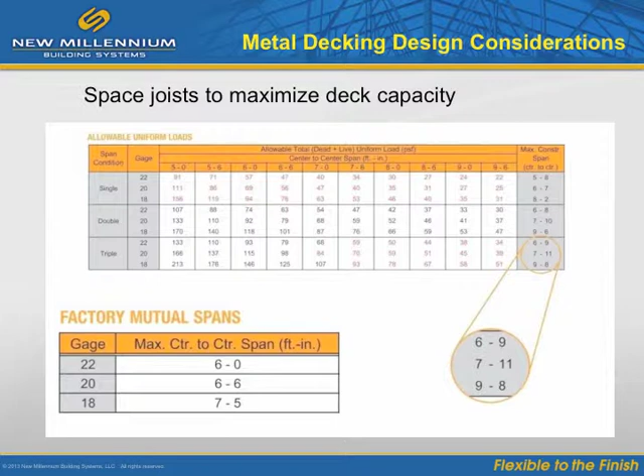Let's review ways to cut steel project costs in the area of decking design. We have made the point that increasing support member spacing not only saves steel, but also saves on piece count. A smaller piece count means less fabrication and erection time, and cost savings are compounded.

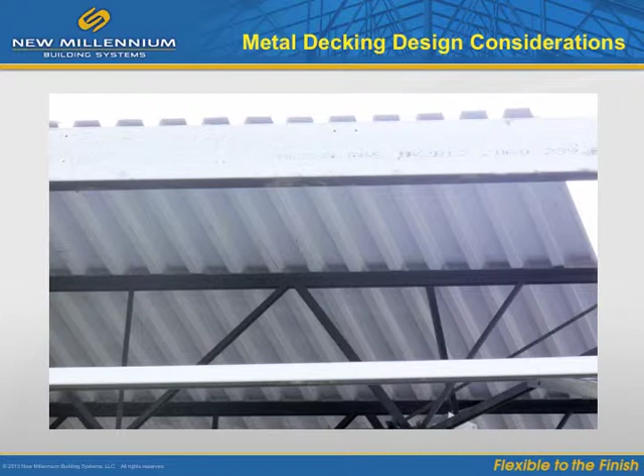When it comes to decking, a common practice is to specify the gauge as minimum. This can result in the use of a thicker gauge than is required. Always specify the gauge and finish along with deck types. This will generate more accurate quotes and eliminate the possibility of coil inventory problems at fabrication time.

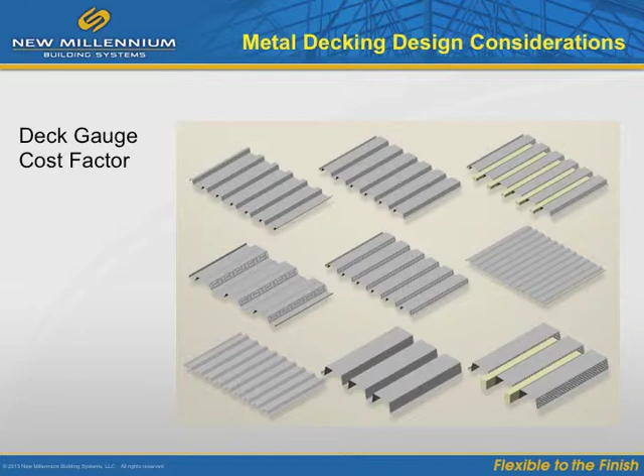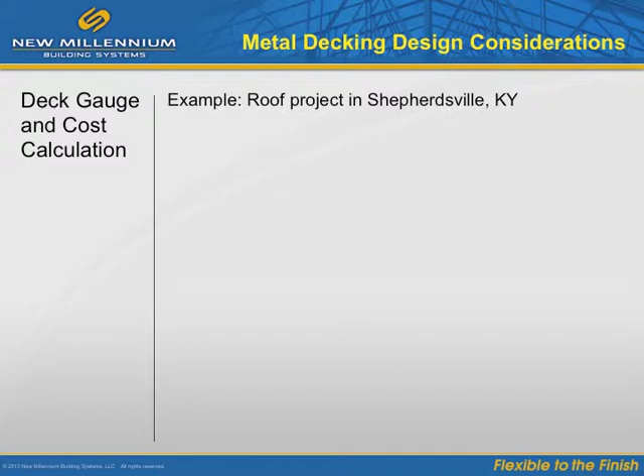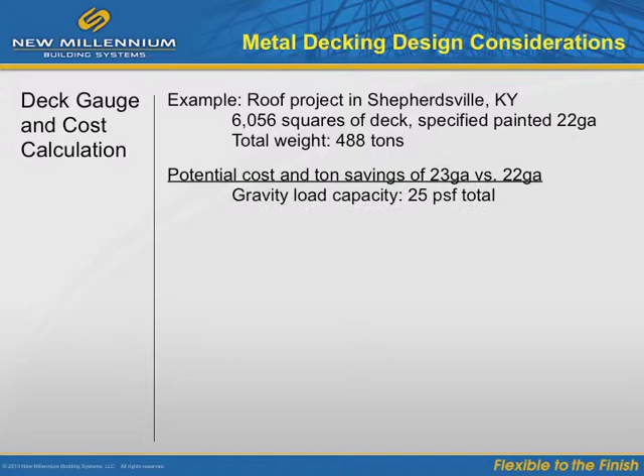One way to reduce deck costs on large projects is to specify a special thickness instead of a standard gauge. A deck project in Kentucky called for over 6,000 squares of B deck, painted 22 gauge, totaling 488 tons. By switching to 23 gauge deck, the project experienced an 8% reduction in decking costs and a 2% overall reduction in the joist and deck package.

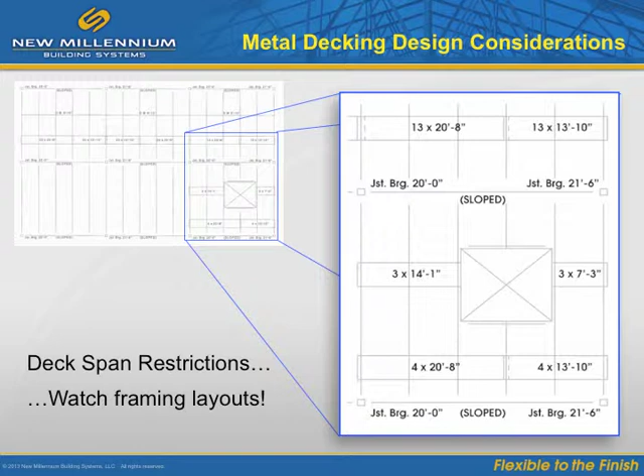When determining deck gauge, be aware of framing layouts that result in single or double span conditions. These conditions are due to sheet length or weight, deck openings, roof slopes, and columns that continue above deck. In the illustration, the joist girders are sloped as indicated by the bearing elevations on the bay. This requires a two-span condition in each bay. Such conditions should be considered when determining deck gauge.

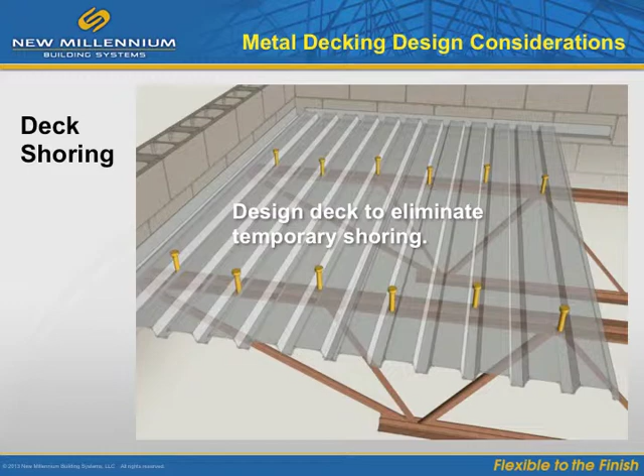Shored deck construction is slower and more costly than unshored construction. To avoid this, the engineer of record needs to specify the deck type, gauge, and span conditions for unshored construction. And when shoring is required, notations need to be made on the contract drawings to alert all those affected.

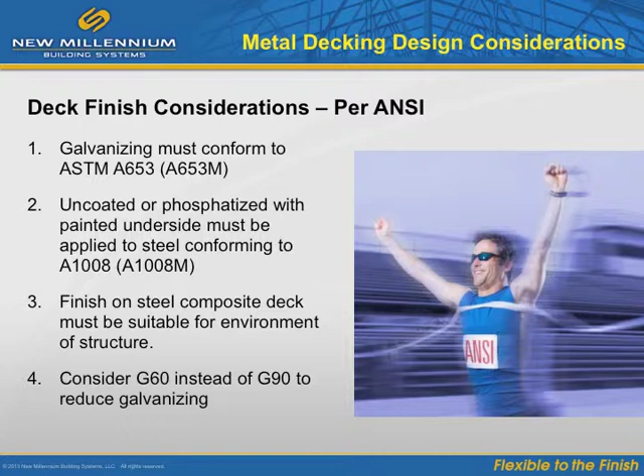Proper deck finish is critical for overall performance. ANSI requirements are: galvanizing must conform to ASTM standards. When phosphatized and painted undersides are required, this must be done according to ANSI. Consider the environment of the structure. And do you really need G90?

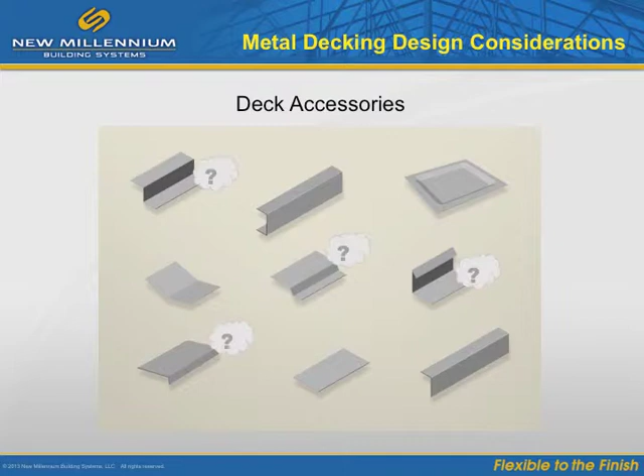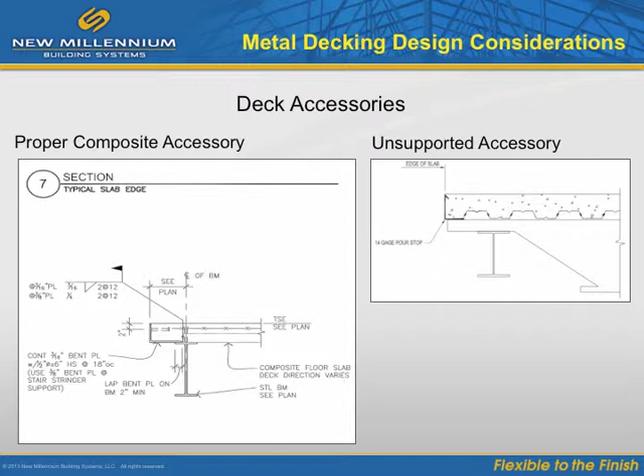Deck accessories is another area for cost prevention. First, clearly identify each accessory. When not identified, they can all look similar. Identifying each accessory assures that all are accounted for. When an accessory is missing at a job site, this adds to erection management time and project cost.

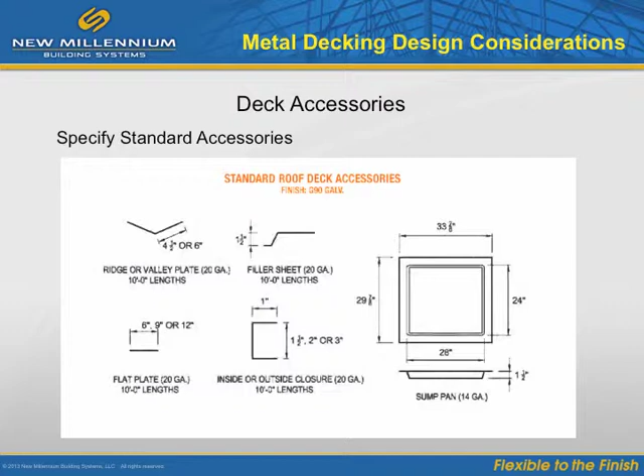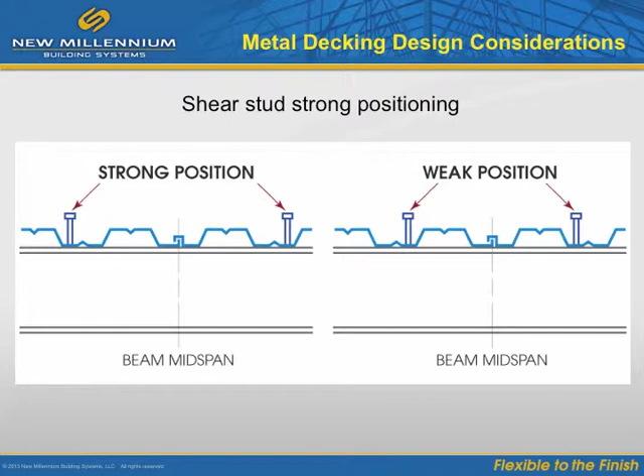Also, try to specify standard deck accessories. Non-standard accessories will almost always add cost to a project. Engineers should show the strong position placement of shear stud to be placed on the contract drawing. This gives the composite slab a higher strength without having to add time, material, and aggravation. This practice needs to be recognized and adopted in the field.

Of course, cost-effective steel project design often begins with meeting the architectural goal. To support new architectural ideas and related roofline shapes, the use of special profile joists has grown. The specifications for these types of joists have been vastly expanded in recent years.

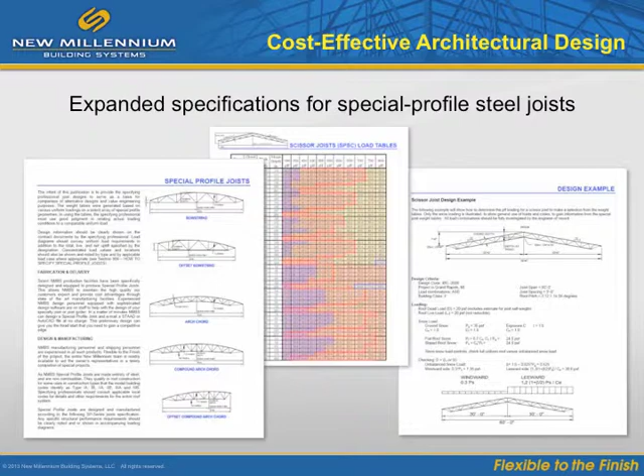So it is now much more practical for an engineer to achieve some of the more imaginative architectural goals using steel joists. In every case, we start with the architect's vision, but it is up to the engineering profession to make these visions practical and cost-effective.

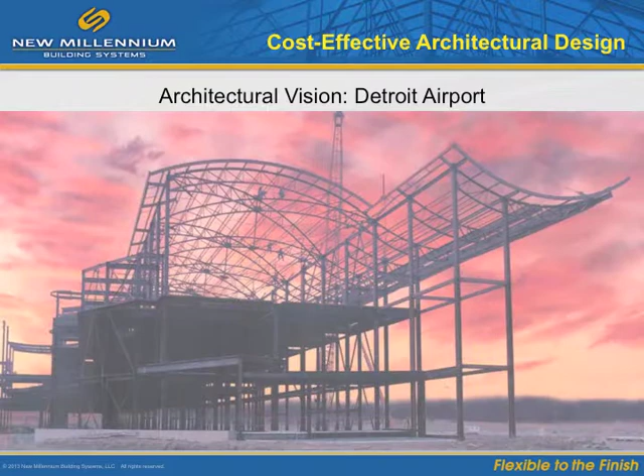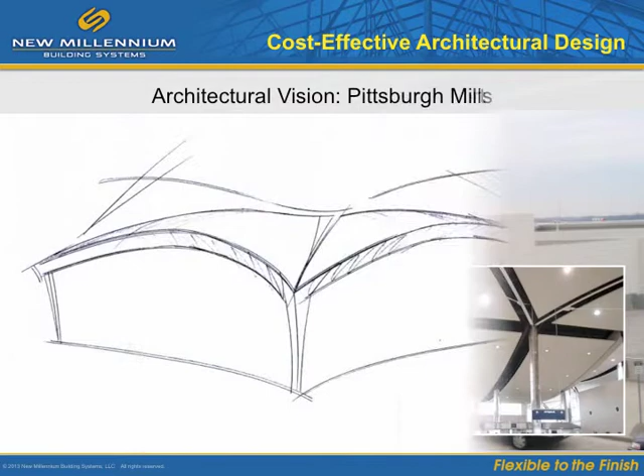By involving joist engineering early in the design process, you can quickly evaluate a range of cost-effective ways to achieve your architectural goals. Our investments in new chord rolling and rigging systems have expanded the possibilities of special joist production, including special accents and other structural treatments.

By taking the project owner or developer's point of view, we can better understand the future of total project cost accountability. Building information modeling has come about directly in response to the need for total project cost accountability. We have learned several lessons about BIM. First, BIM is a team approach, and BIM works best when joist and deck design occurs early in the project.

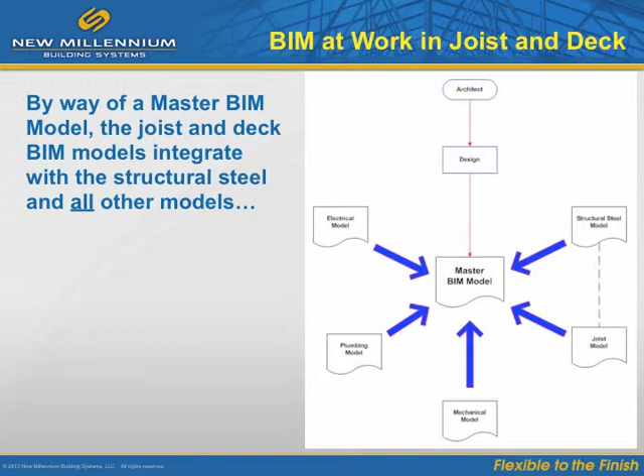The steel joist BIM model and all other models flow into the master BIM model. Note the dotted line between the structural and joist models. These models are submitted together for the master model.

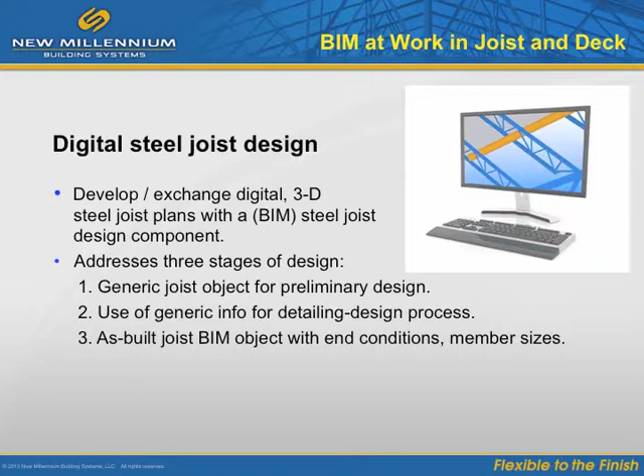Digital steel joist design is facilitated by a digital design component. The component enables BIM-based collaboration at every phase, starting with initial generic joist placement by the designer, then sharing initial generic joist detailing information, and then the creation of the final 3D model for discussion and refinement of the plan.

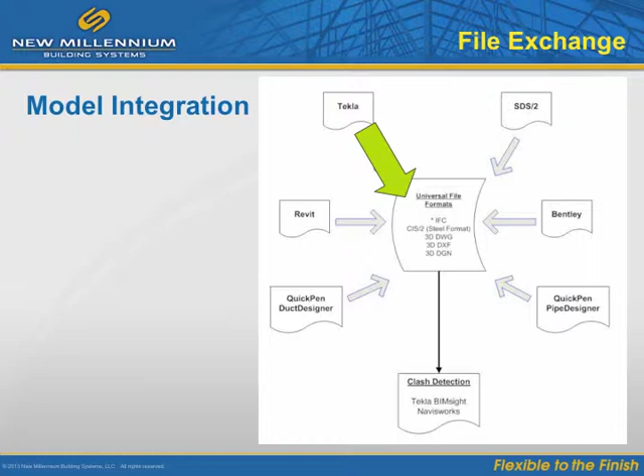The BIM joist design component may be an add-on to the software provided by structural design software companies. Using the IFC format, BIM joist models can be exchanged with anyone on the project, regardless of what software they are using. IFC stands for Industry Foundation Classes, established by the Building Smart organization.

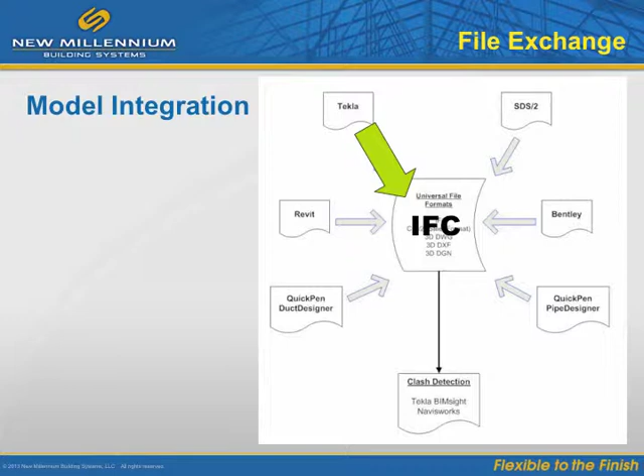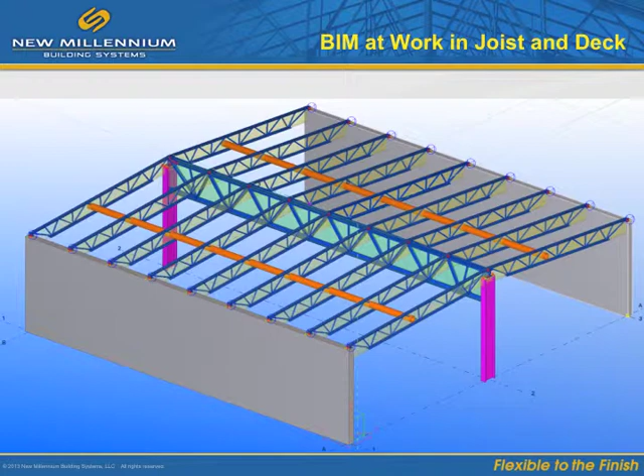Here is how 3D digital design works in the steel joist environment. Conventional 2D design packages will generically represent joists in a drawing. To give these generic shapes actual dimensions, the joist supplier uses a design software component or plugin compatible with the 3D structural engineering software. So right away, you can see what is going on in the plan.

You can see that we have a clash here with a mechanical run. Here's another look. By quickly changing dimensions, you can avoid the conflict and immediately verify the correction.

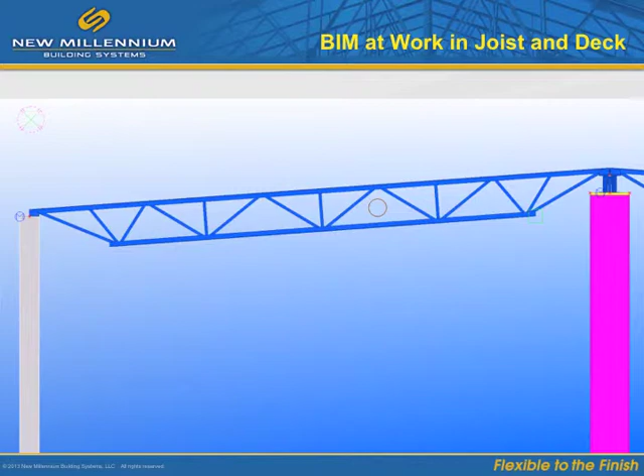BIM-based design projects are especially effective from the owner's point of view. The entire structural package, including joists, was modeled in 3D BIM, here using the Autodesk Revit platform. The timeline for shop drawings was reduced from 10 weeks to 3.5 weeks.

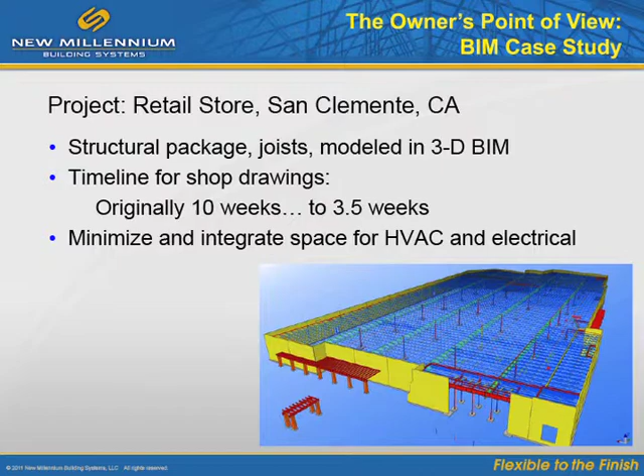Another goal of the BIM project was to better utilize the MEP space around the steel joists in the stores. During the digital design phase of the joists on this BIM project, many cost-saving opportunities were revealed.

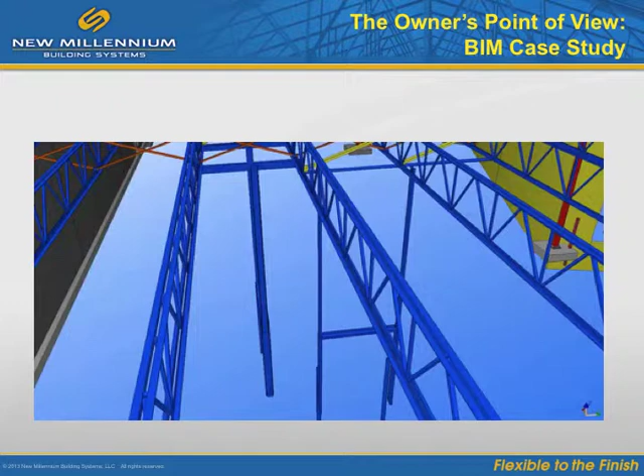For example, the 3D model showed that a stabilizer was not planned for this joist girder. So the engineer designed a stabilizer hanger for the bottom chord extension, preventing a field erection problem. The reinforcement for this door framing, including bolting details, were clearly engineered in the model.

The model also showed the RTU framing, the mechanical support, by showing exact positioning. The 3D model enabled the structural detailer to coordinate with the steel joist detailer to extend the bottom chords of these double joists for added reinforcement.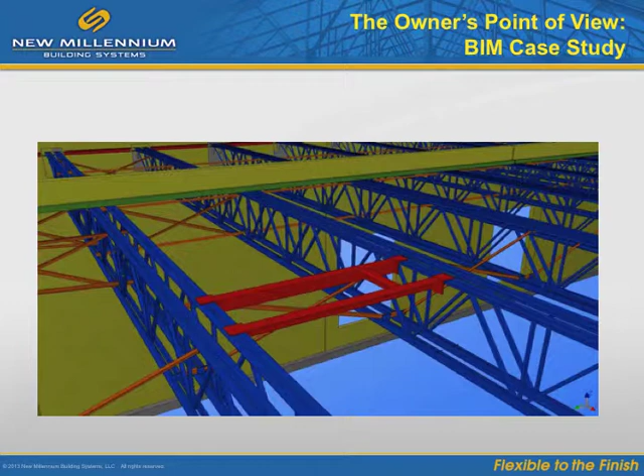Design and connections for a satellite receiver support were clearly communicated. Roof drain positioning and support considerations are clearly aided by the as-built joists in the digital model. Even stairwell reinforcement was improved upon.

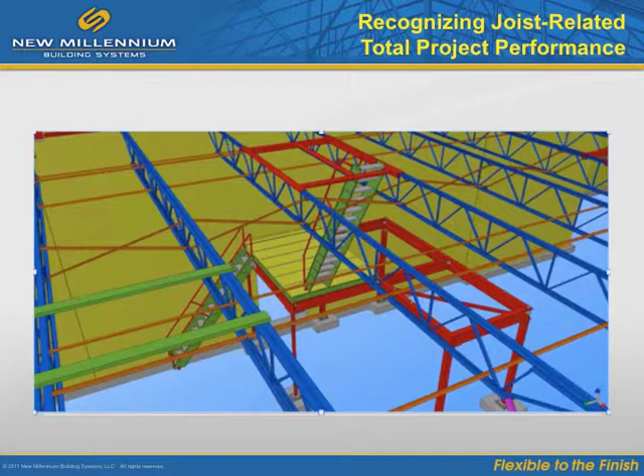When the plan was pulled into the 3D environment, the joists were used for reinforcement at the top. The design was correctly expressed on the bid documents for the structural steel and concrete package, so the design could be bid on as an already coordinated first competitive cost.

With the use of BIM, a project can move from concept to reality much more efficiently and cost-effectively. Owner point of view will increasingly drive cost accountability on a project. As more owners, developers, and construction managers become informed about new and better methods of project delivery, they will insist on them.